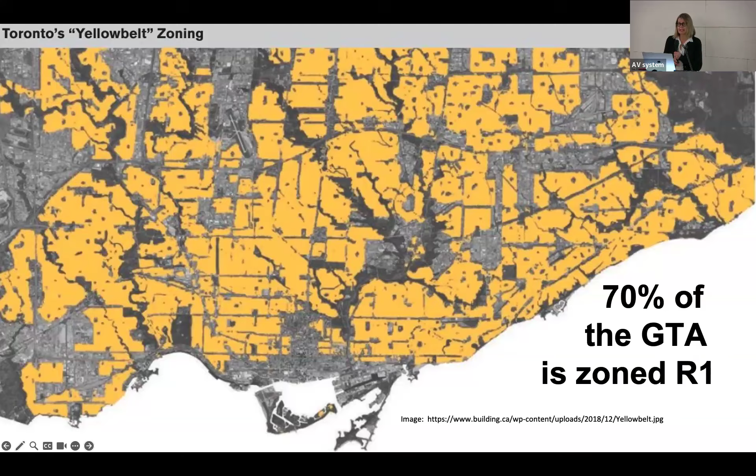All of the land in yellow here is 70% of the GTA zoned as residential single family. A lot of people have been talking about this for some time as a destination for locating additional housing. The Main Street initiative from the City of Toronto is intended to address it with 6-story buildings along Main Street, replacing the many 2-story buildings that are there currently, which are a poor use of transit and space. But these have also proven not to be particularly prolific, because it's hard to assemble land, they're expensive to build, and for a number of different reasons.

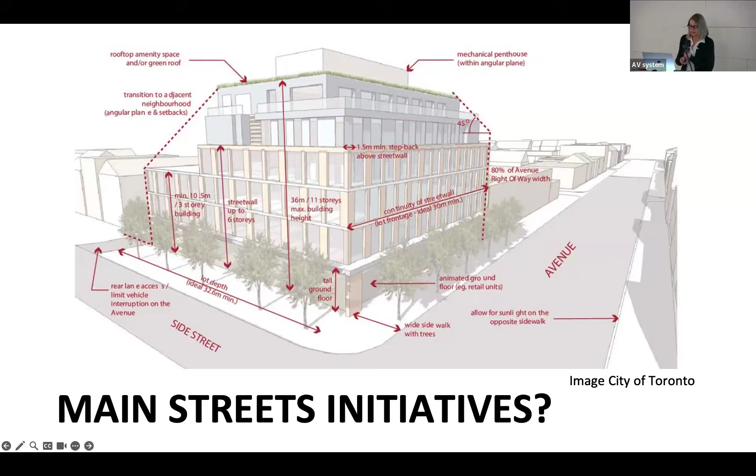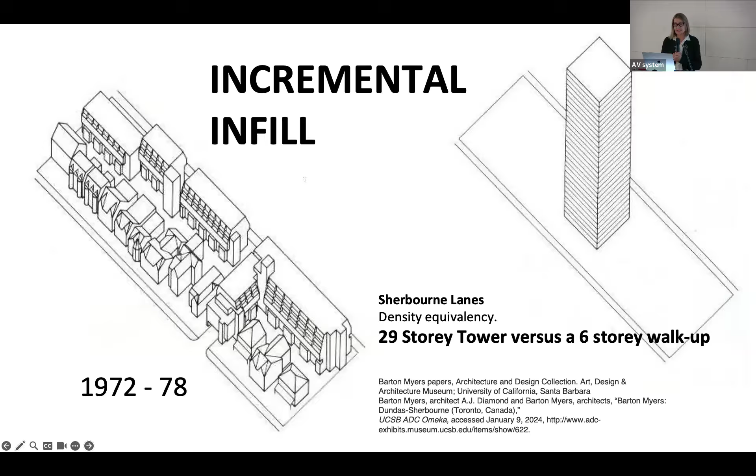So the city is reassessing the guidelines around these. Going back to some incremental infill that Adrian talked about in his talk at the beginning of the series last fall -- in our neighborhood, Sherbourne Lanes, which was a fairly remarkable project when it was first introduced in the 1970s by Diamond and Myers, looking at, in lieu of building towers at the time, how can they put the same amount of density into a mid-rise infill project on existing land? So we visited that project at the beginning of the semester.

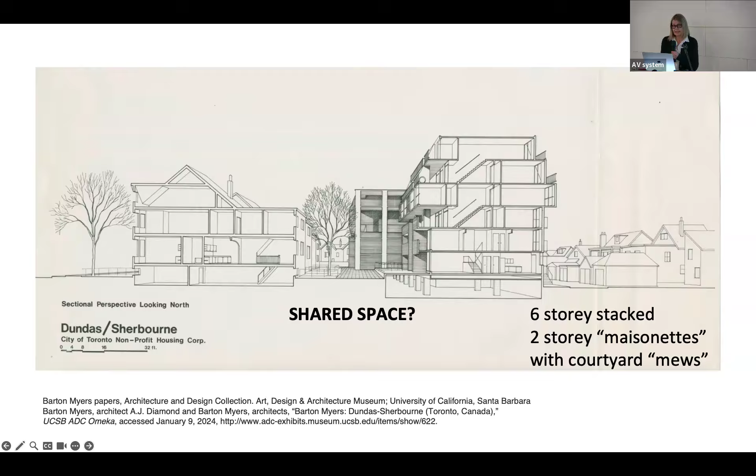What's also interesting about the project is the amount of shared space, gathering up all of those backyards and amalgamating them together to make a common shared area and mews. Unfortunately it's all fenced off now, but that was the original idea: walk-up apartments, 6 stories stacked, 2-story maisonettes, and the courtyard mews.

The office went on to do other projects based on infill and the courtyard premise as a foundation. So the Beverley Street apartment complex, otherwise known as Hydro Block because it was built on surplus land owned by Hydro, has remained a very well used and well loved building that fits into its situation in the middle of the city, not far from the AGO.

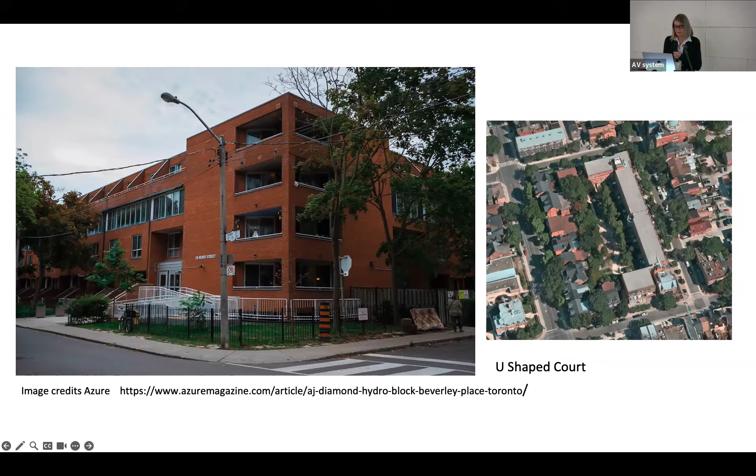Again, walk-up maisonettes, no elevators, skip-stop units with hallways only every second floor, a store at the base of the building, and lots of shared amenities like laundry rooms and outdoor space.

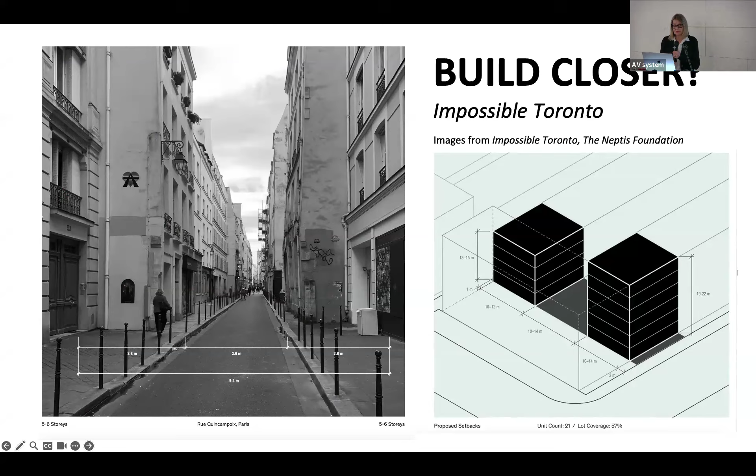So what are the things that an architect can do? We can build closer. We all admire European cities where everything is much tighter. We like the streets, we like the activity on the streets, we like the atmosphere of these kinds of urban situations. But it's not always possible to do that, because our urban infrastructure isn't set up to accommodate a wholesale transformation of our street infrastructure.

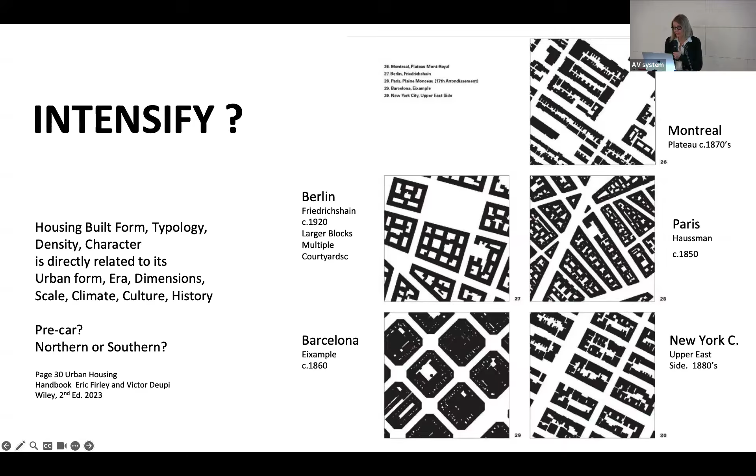So how might we intensify? We can revisit abandoned and locally outlawed typologies like courtyard apartments, which used to be prolific in the early 20th century, in the 1920s, until local bylaws zoned them out. So they're another typology that we can advocate for and start to reincorporate.

We can build smaller units and more public space. In Canada we have some of the biggest housing units in the world, second to the US and third to Australia, whereas many other places in the world have much, much smaller footprints. So we haven't taken advantage, or we've wasted the amount of space that we have, and sprawled for a long time.

We can share spaces, building collective housing, gathering those backyards into one big common space, like a courtyard for everybody to share and use, and build lower heights.

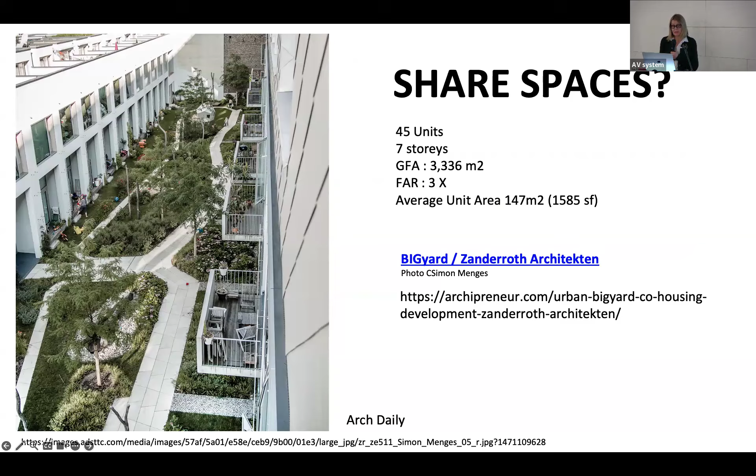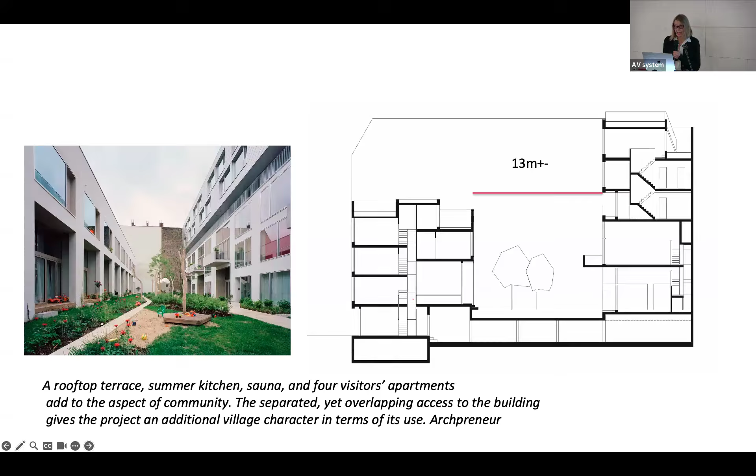This is a project in Germany where the blocks are a little bigger and you can accommodate things like that. This is a cross section of that same project, called BIGyard. The block width is big enough that they can again use a kind of typology of stacked units, walk-up apartments, and a shared common area.

As a kind of hybrid typology, just around the corner from TMU, 60 Richmond Street — that was a project that was wrapping up in the office when I left. It's an interesting typology in that it's not just a courtyard, but a vertical courtyard, carving spaces vertically out of the main building. It's on a main street, but it's not terraced back. It's maybe not the most efficient building with all of that envelope.

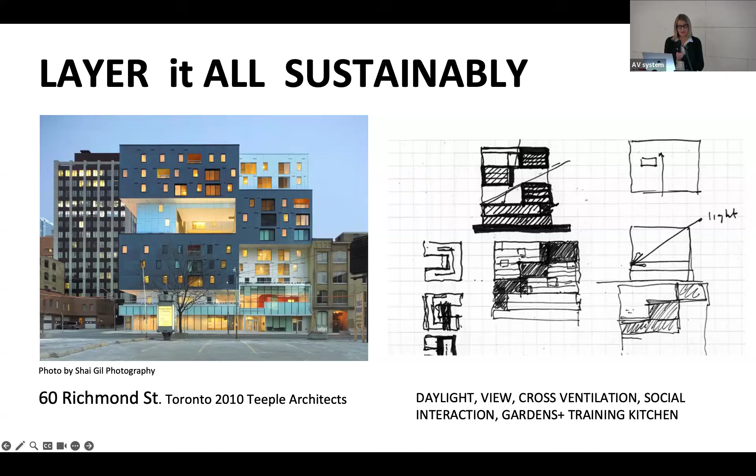But it's got sustainability at its foundation in terms of bringing in lots of natural light, making window openings relatively small, and designing to passive house standards in terms of envelope. It also introduces social sustainability by having uses at grade, like a training kitchen for residents who have all come from Regent Park as it was being developed. So thinking about how people could live together sustainably, not just in terms of saving energy, but also socially.

This is a project from one of our students, Mia Brown, who is in third year now — this was her project at the year-end show last year. This is the project our students will be moving on to next, at the end of next week, when they finish developing and presenting the laneway houses they've been working on for the first half of the term.

So we've been working on a site near Allen Gardens with our students. They're taking typical laneway housing sites in the neighborhood and intensifying them, building higher than what's allowed by current bylaws. We'll be doing a similar thing on another set of sites, all situated around Allen Gardens. So that's what's coming up next.

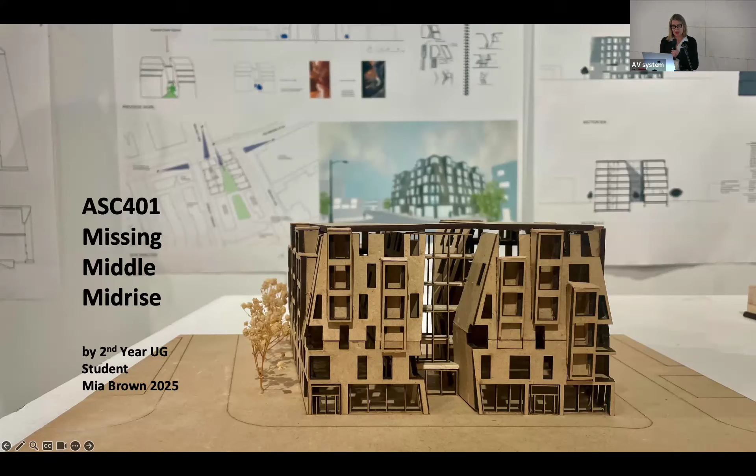I'm going to segue now into some of my own projects, starting with one Adrian mentioned, from back in 2017. A group of engineering students wanted to enter the Solar Decathlon in China that year, and they came to us because they weren't getting anywhere with the design. They were proposing a steel tower with lots of added technological elements, but it was completely unsustainable in many other ways. So I got together with a couple of students over the summer, got a small grant, and we worked on this project.

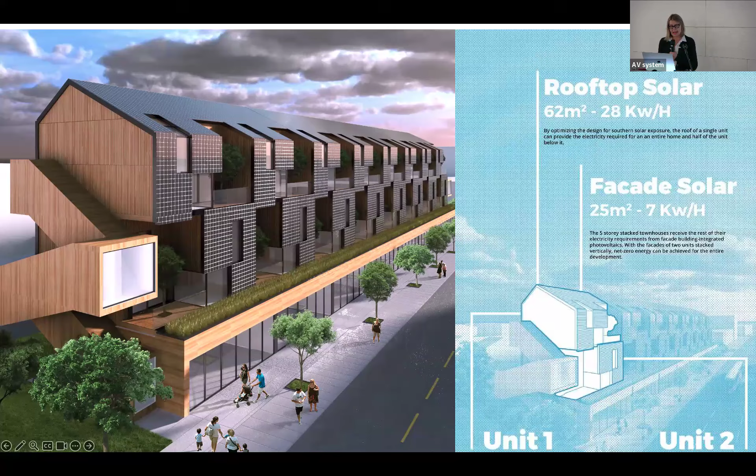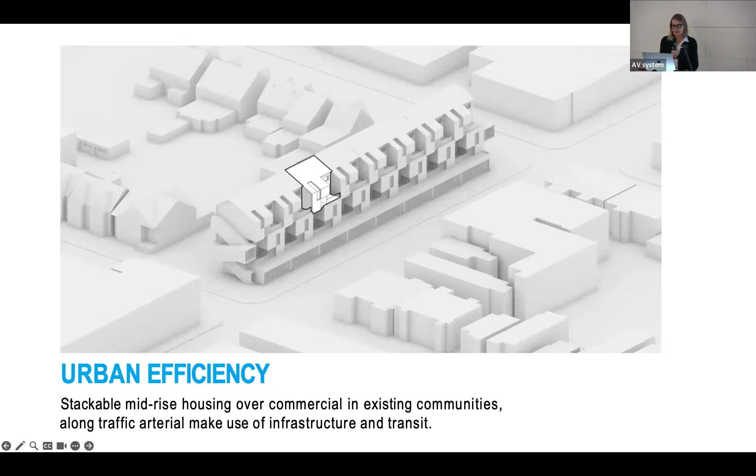We turned it around into something more about a horizontal building, similar to the mid-rise guidelines, using existing infrastructure like high speed arterials or low quality arterials that abound in Toronto on east-west orientations. We used the building to accommodate larger 3-bedroom units for families, within family neighborhoods close to schools, daycare centers, and other local amenities like libraries.

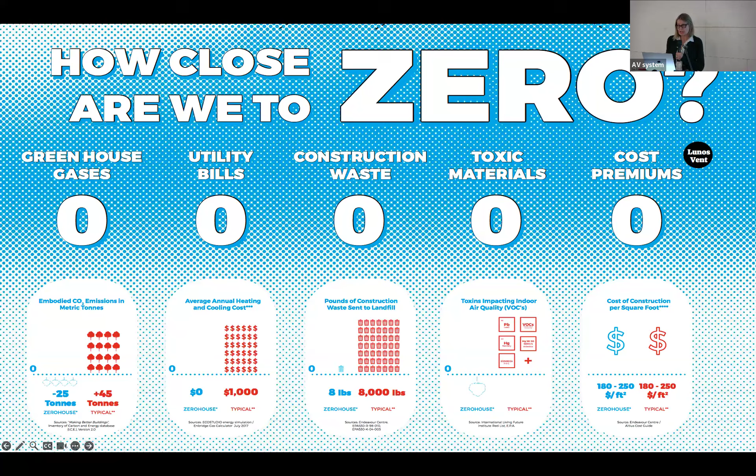The other layer we added was thinking about construction efficiency and investigating prefabrication. At that point we involved another partner, Chris Magwood from the Endeavour Centre, who runs a program in Peterborough training students to build passive house projects, with a prototype every year. Between our teams, we discovered there was an exhibition happening in Toronto, so we abandoned the Solar Decathlon in China, which was too expensive, and pursued building a prototype unit to exhibit at Edit DX in the fall.

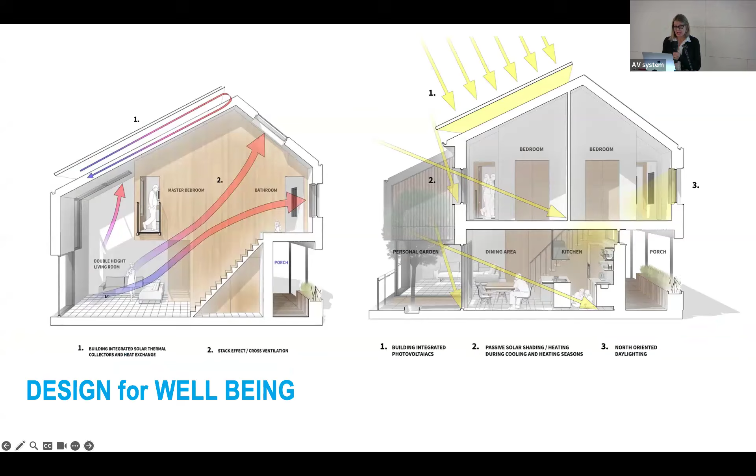So that's a cross section of the project - stacked maisonette units with skip-stop walkways every second floor, which are communal spaces for residents to meet and see each other, with windows that open so all units have cross ventilation through the corridor, and a buffer space to enter.

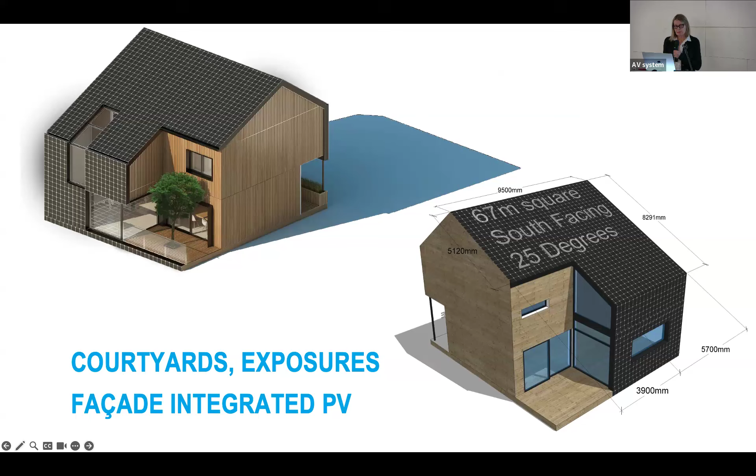The theory was that we would use the facades, because we're a high latitude country, to capture lots of horizontal daylight in the winter when you need it to generate energy, incorporating a building-integrated PV solar system into the facade.

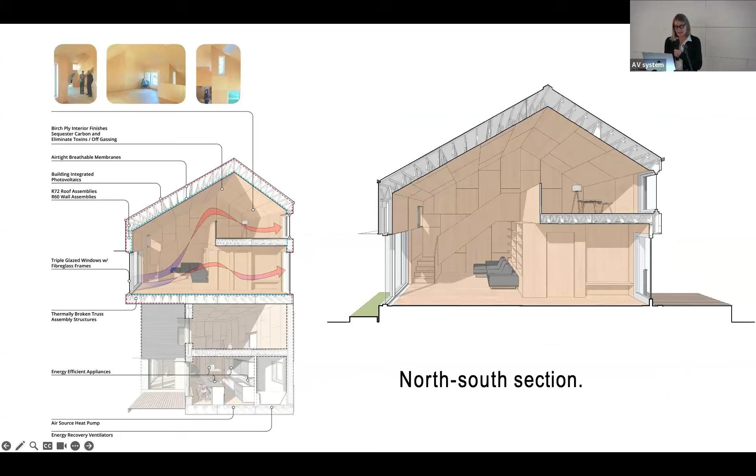Each of the units has a large courtyard so you can put a table out there and eat, with 3 bedrooms. There's a cross section with lots of room for insulation, using panelized construction - we began developing the panelized construction strategy here.

The final prototype was designed as a freestanding house. To pay for the project, we found a buyer, and proposed after the exhibition to re-erect it on her land. Here's an image of the photovoltaics and their peel-and-stick system that goes between each panel of the standing seam roofs.

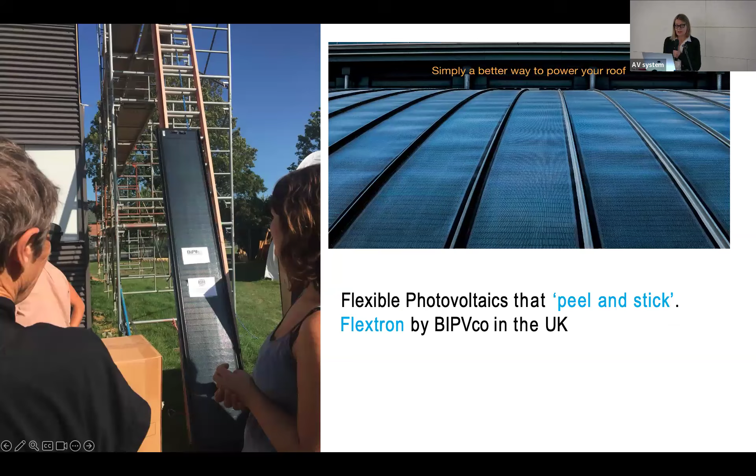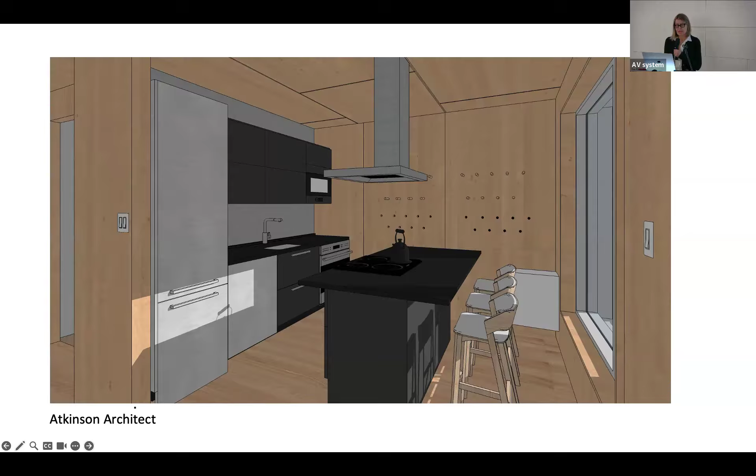There's the cross section. It has an open-to-below mezzanine on the second floor - the owner has since added a bedroom. There's an image of the kitchen. Everything was panelized to be assembled on site at the exhibition, using birch ply veneer panels with an IKEA kitchen.

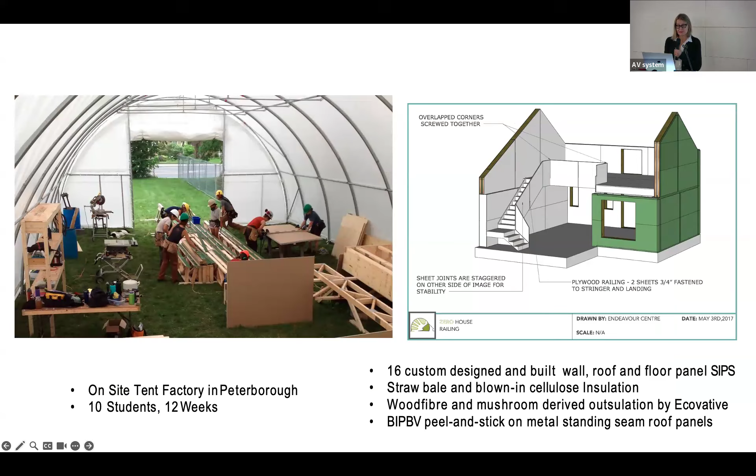This is the construction process - it all happened off site in a field in Peterborough over a summer with Chris Magwood's students. There's their drawing of the panelized system we used, and them working on big, thick panels. There was straw bale in the lower walls of the building and blown-in cellulose in the top - you can see them packing straw bale into the box sections.

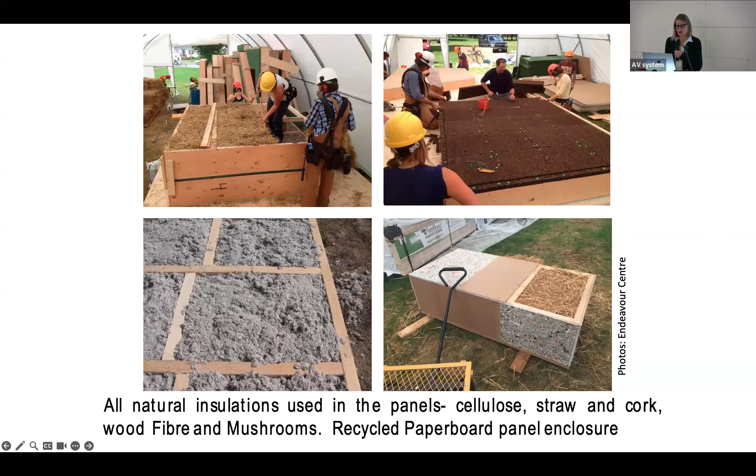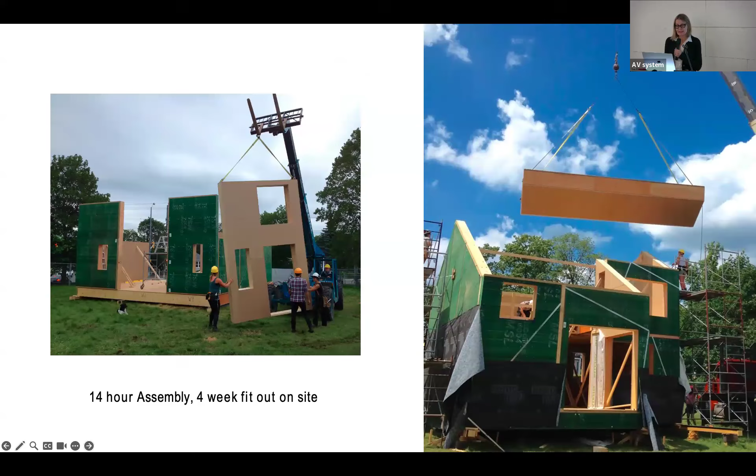We experimented with mycelium, cork, and a variety of different materials, tilting up panels and craning them into place. Assembling the house took 14 hours, and longer to fit out once it landed on its final site - that was the process during construction for the exhibition.

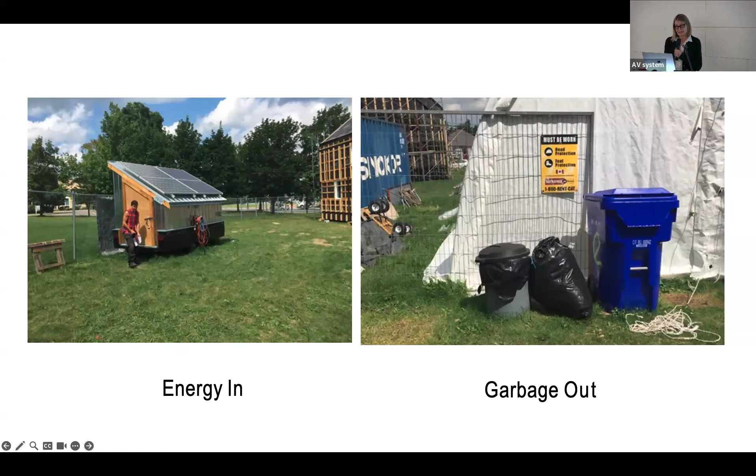All the energy used while building it was supplied by 4 solar panels in the field, donated by some nuns in Peterborough. The image on the right shows the amount of garbage dealt with at the end of the project - everything was recycled.

That was the Edit DX exhibition, which was a huge deal held in the Unilever building before it was torn down. And there it is on site at the exhibition.

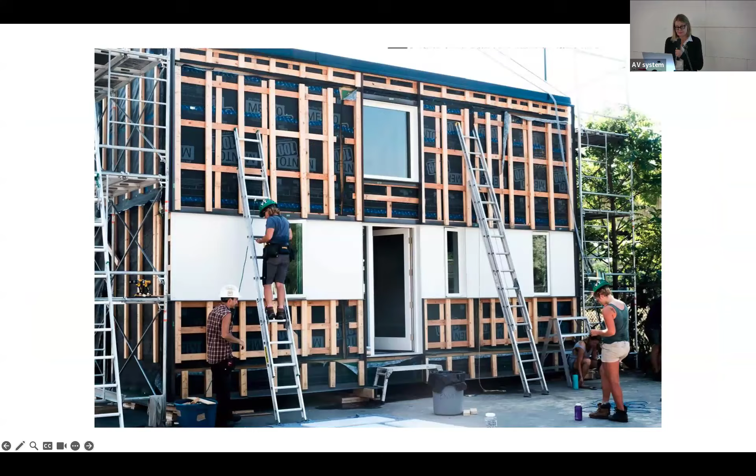Under reassembly, the panels were all shipped with the membranes and strapping ready, and they were reassembled on site, both outside and interior panels. Flooring was already installed. There's an image from Tom Arban, who took it while it was on site at Edit DX. So it turned out quite beautifully.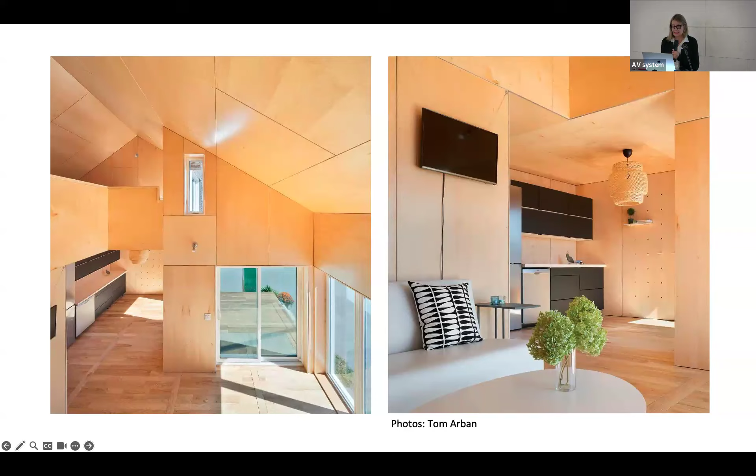That's a level viewing down from the level below, or the level above. So it was built three times in total between these different locations, and that's where it sits now - or sorry, not in Peterborough.

It started in Peterborough. Now it's in Collingwood, where my friend Kim Harris now lives. So she bought the thing and it was re-erected on her site. She says it costs her $200 a year in energy bills, which is mostly the cost of distributing power to her site. The solar panels are just on the hipped portion of the roof, and she found a site oriented north-south, so it works.

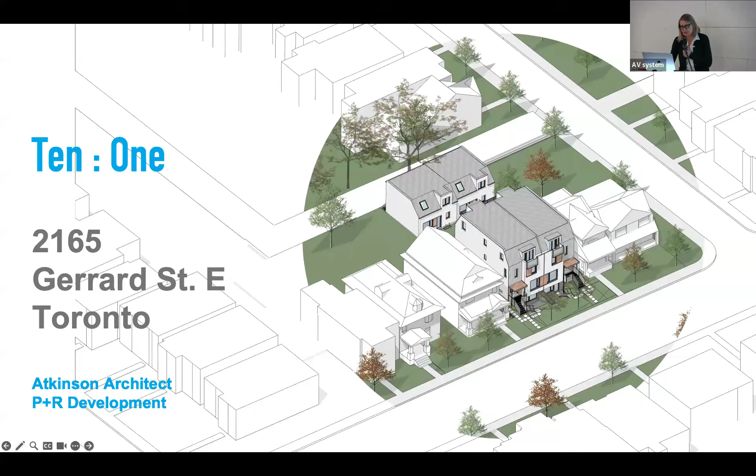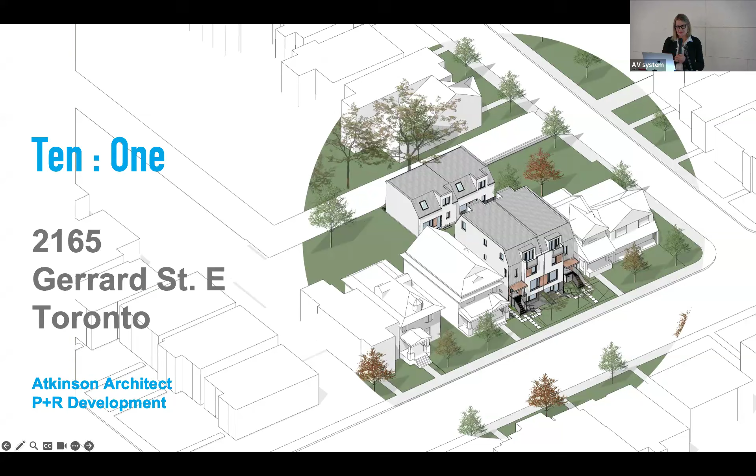The next project I'm going to show you is one that was just finished last spring, on Gerrard Street East. I worked with a client who came to me after seeing the house I just showed you. He was responsible for working with Martin Liefhebber, who developed an off-grid house on a laneway in the 90s for his family. Rolf Paloheimo was very interested in early eco development, and he lived there off-grid for about 20 years. He developed the water recycling program, and it was all powered by solar energy.

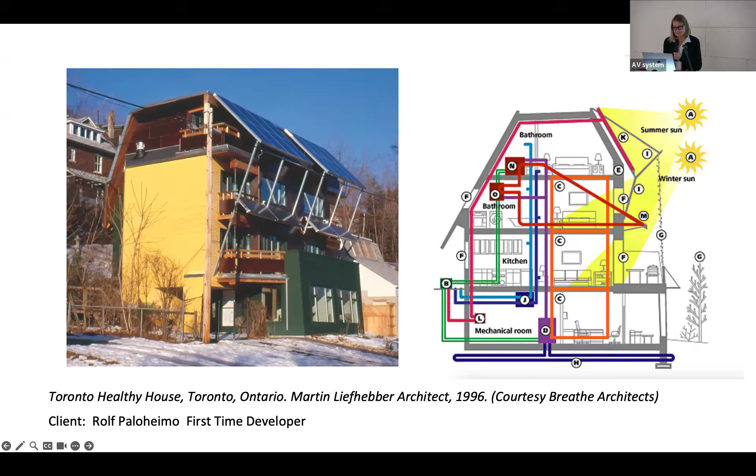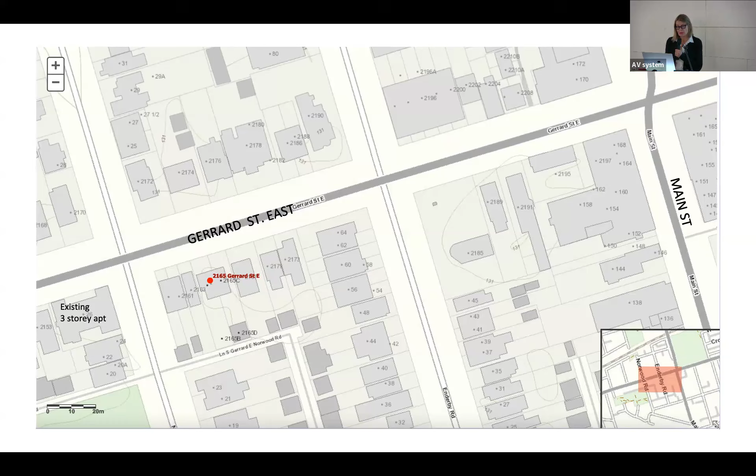So this is the site location for the Gerrard Street project. It's well located, close to a main street, to transit, to a park, and is full of a range of building types, from large 19th century homes on similar sized sites as ours to apartment buildings and narrow lots. This building here is the house we tore down that was on site. This is a 3-story apartment building nearby, and these are the neighboring houses next to our site.

So this was a lengthy approval process. We tried a number of different things. The first idea they had was to do stacked townhouse type development, and they wanted to divide the 50-foot lot into 3 lots. That wasn't allowable because it was considered too narrow for the neighborhood, even though there were other buildings of that size already there.

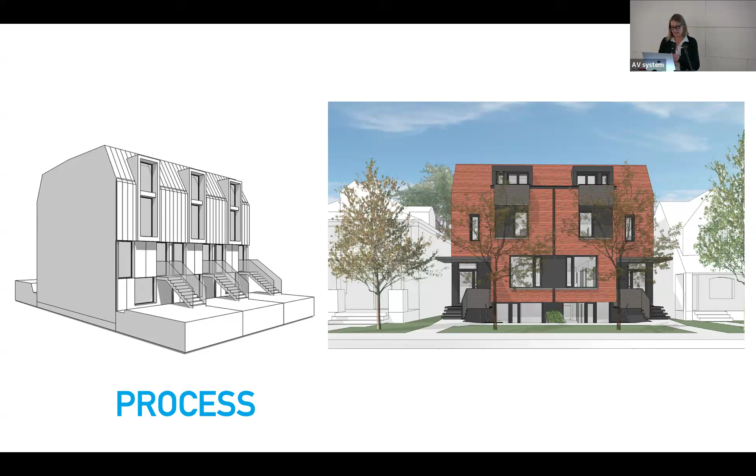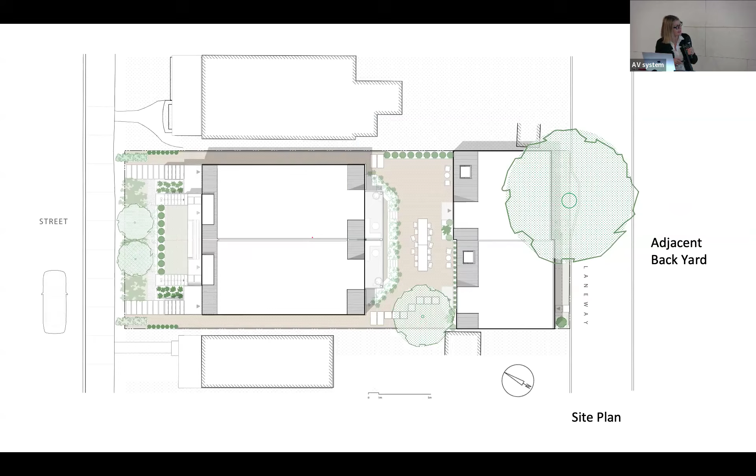Eventually we subdivided the site into two lots and came up with a plan to make two fourplexes and two laneway houses at the back of the site. So there's a site plan - there are the two attached fourplexes, the two adjacent houses, the two laneway houses, and a shared courtyard between them. The laneway is part of a turning laneway that's close to a fire hydrant that makes those possible.

There's a typical floor plan. Each floor is slightly different, due to the fact that all the buildings have a front door. In the fourplexes, each unit has its own front door, which allowed us to avoid a second set of stairs in the project. Each apartment is about 1,000 square feet gross, including walls, and the laneway houses are each about 1,300 square feet, again including fairly thick walls.

So this was also all built, it's not Passive House certified, but it's using Passive House details, energy specifications, wall thicknesses and materials. They're all 3-bedroom units, except for 2, which are 2 bedrooms. So out of the 10, 8 are 3 bedrooms.

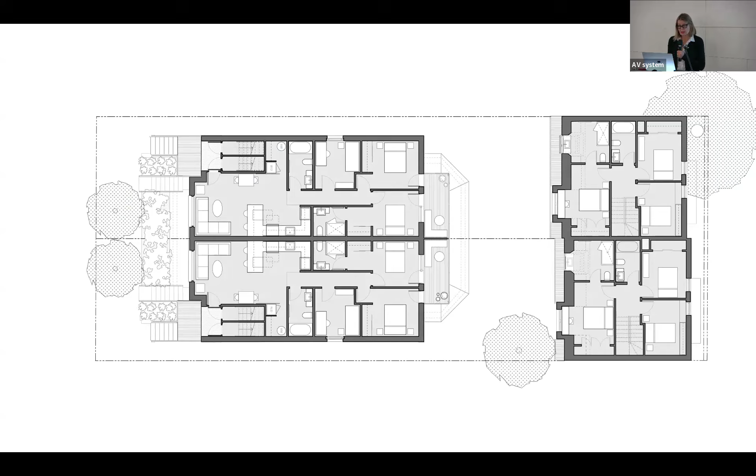There's a view of the cross section of the project, and you can see we had to build under a very significant tree, which was going to make the project kind of unviable. But with an arborist, and in collaboration with urban forestry, we were allowed to build over the tree roots using helical piles between the roots. So it's a floating, insulated wooden slab over the tree roots for the laneway house.

It's something our second-year students are familiar with, because I allowed them to do the same thing on their projects, which each have a tree on them in their current laneway projects. There's one of the cross sections through the tallest stair.

There are sunken courtyards at each end of the lower level units. Because of the difficulty we had trying to get approval on the project, there were lots of neighbors, as is typical in Toronto, who didn't want us to do the project at all. They were very against having greater intensity in the neighborhood, even though there was a range of building types already.

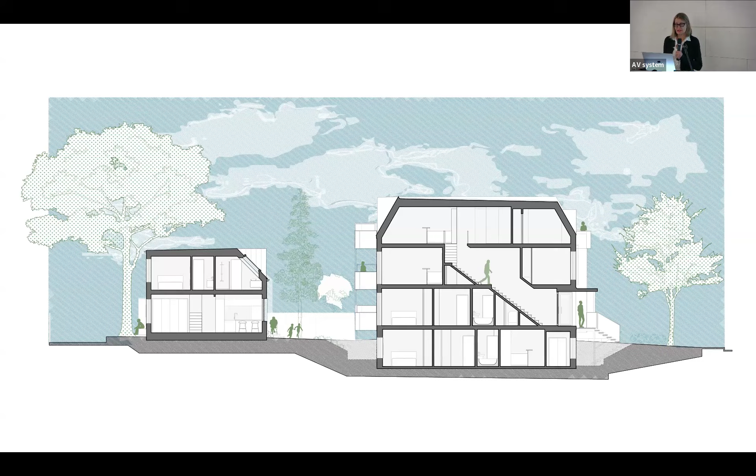So we decided we had to keep everything within the as-of-right boundaries of the bylaw after we got our variance to subdivide the site. Everything's under 10 meters in height, which meant pushing the lowest level units half a level below.

This is a collage of articles that came out about the project while it was under construction. It became very topical because as we were finishing up and people were seeing it on site, the building officials came around and said, well, you can't do this. But we're almost finished. Other people were applying to do a similar thing on their properties, and they decided this was outside the intentions of the bylaw, because it was now suddenly an apartment building if it was 2 attached fourplexes.

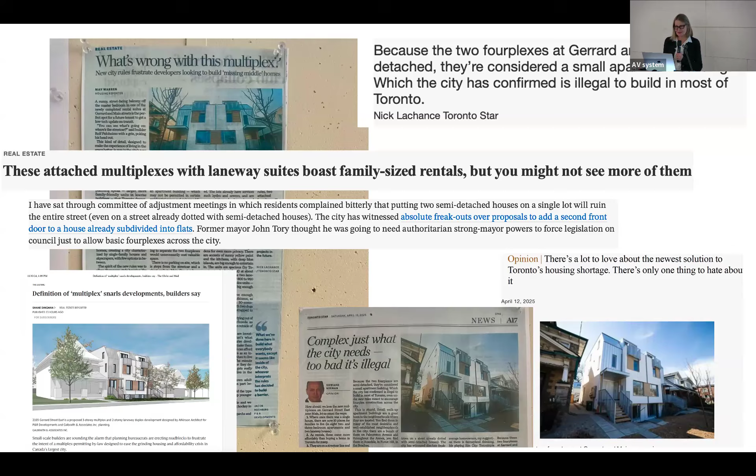So it was an 8-plex, therefore an apartment building, therefore they wouldn't let anybody else do this anymore. So there was a lot of attention paid and to and fro with various people. And when Jason Thorne came in as the new urban planner, he changed the bylaw to make this acceptable in June, just as we had to hold off actually renting them out while this discussion was going on.

So this is the project and how it fits on the site. You can see it's pretty innocuous. The sloped roofs are exactly as required by the city bylaws. We built to the millimeter of what was actually possible within the bylaws.

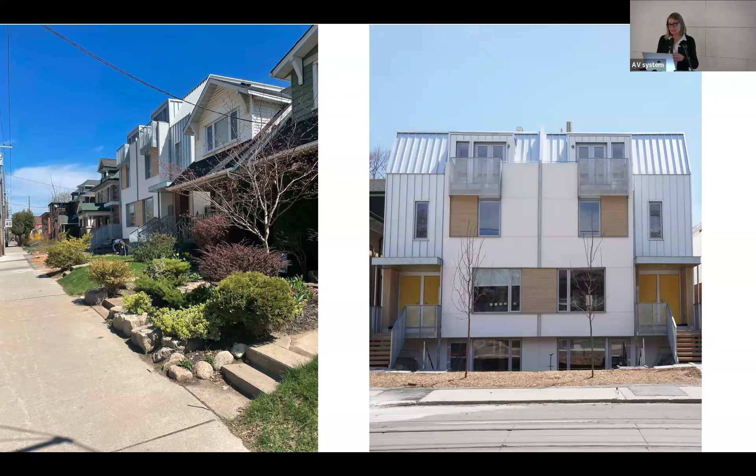So the thing that looks like a face at the front is the 750 millimeter overhang you're allowed beyond the setback at the front, and you can see there's a pretty deep setback typically on these sites in Toronto. We could have had a bigger courtyard if we didn't have to adhere to those setbacks, but we didn't want to risk asking for a variance and have the whole project killed.

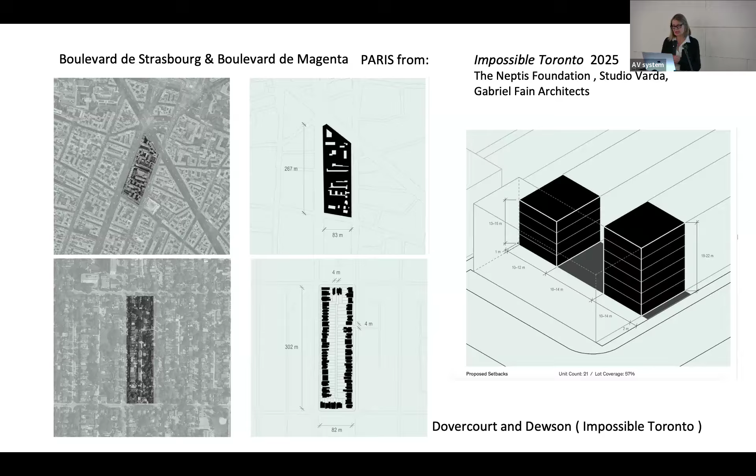So they pulled the building right up to within a couple meters of the site boundary on the street. And that's a cross section of it here, so you can see what that looks like, and it's possible.

It's not impossible. It's very similar to many buildings in Europe that work with those kinds of dimensions that we assume aren't going to be livable, that we assume aren't going to be comfortable. But when we're in Europe, we think they're just fine.

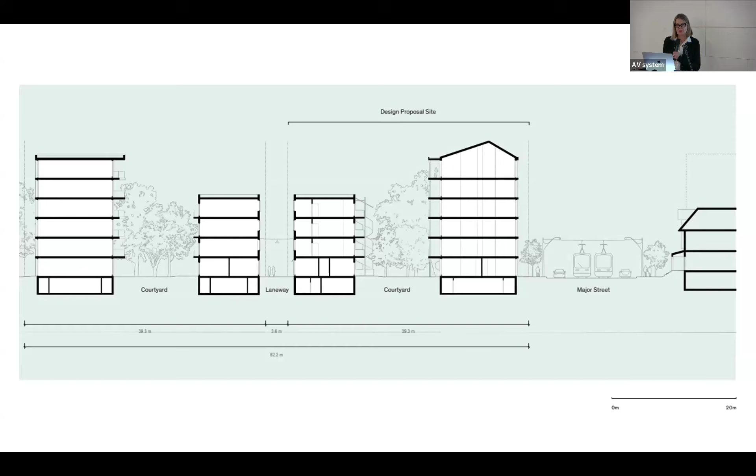So I guess to wrap up, what is possible in Toronto? What is possible right now?

On this project, we achieved 130 units per hectare versus 25, which is the average density of units per hectare citywide in Toronto. We achieved 430 people per hectare versus 65, which is the average citywide. That's taking into account high rise and all of that low rise.

There's 6 3-bedroom units, 2 2-bedroom units. The hard costs for construction were about $280 per square foot—and excuse me using square foot, but everybody operates that way in construction—for residential construction, not other construction, but small residential construction.

It's a walkable neighborhood. There's no huge transformer in the front lawn or a Canada Post mail station. And that's the end of my talk.

I haven't left a ton of time for questions, but maybe Adrian can tell me. Well, I think we've got till 3:15, maybe. Okay, so we've got a microphone, and if anybody would like to ask some questions, I can answer them, or if there's questions from the other audience, Adrian. Yeah, let me see, we have an audience here, a live audience. Yet, feel free to put your hands up. And I don't see anyone online yet.